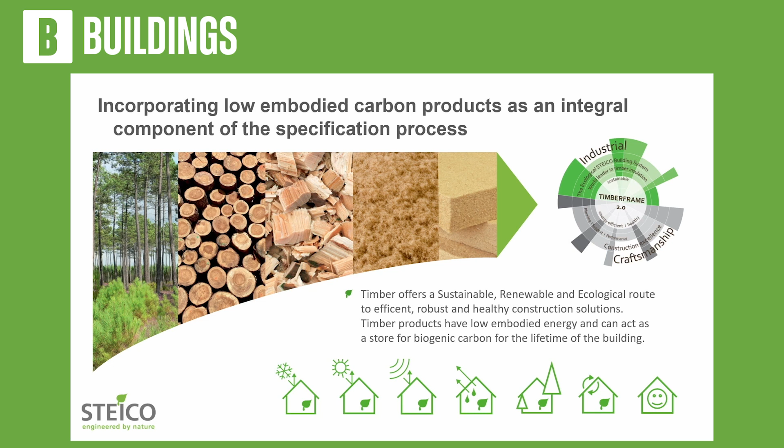All bio-based materials generally have low embodied carbon as a rule and act as a good carbon store. A quick example of this is a project we were involved with at COP26 back in 2021 with Roderick James Architects under the banner of Beyond Zero Homes, which was a combination of like-minded companies that came together to build a low-carbon house. So working together with Circular Ecology, we were able to show that incorporating timber products in walls, roofs, floors helped to reduce the embodied carbon in the building by 22%.

Sorry, should have jumped that one forward.

Which has exceeded even the most stringent targets set out in the RIBA 2030 challenge. What this highlights is that we don't need to wait for things to come along. We're already there. We were able to do it based on bio-based materials back in 2021. So if we built from this base, think of what we could actually achieve by 2030.

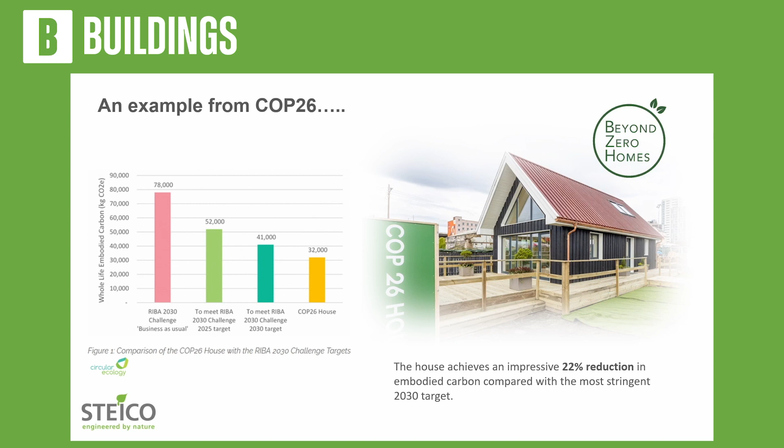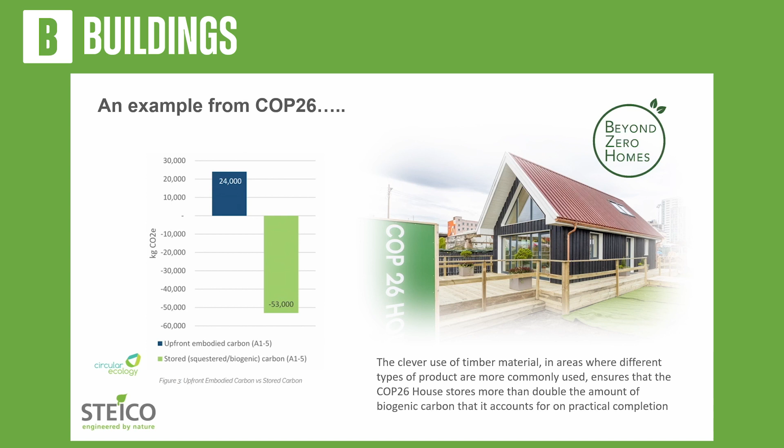So without any further ado, I'd like to introduce Tabitha Binding, who is one of the most knowledgeable wood experts I've ever come across, so it's my pleasure.

Is this working? Yes? Oh, brilliant. Thank you, Craig. It's been such a pleasure to be asked by STEICO to come and speak about specification and low-carbon natural materials. I've worked with STEICO and Craig since the very first TRADA University Challenge, where we were getting interdisciplinary students to work together to understand more about timber and more about natural buildings and materials. So this was put together back in December, but I'm currently on sabbatical.

And I wanted to talk mainly about small projects because Christian will talk about large projects. So is anybody looking at small projects? Like small, so less than 100 square meters. One. Anybody looking at large projects? Oh, there you go, Christian, you got more of them. But STEICO's going to be happy either way.

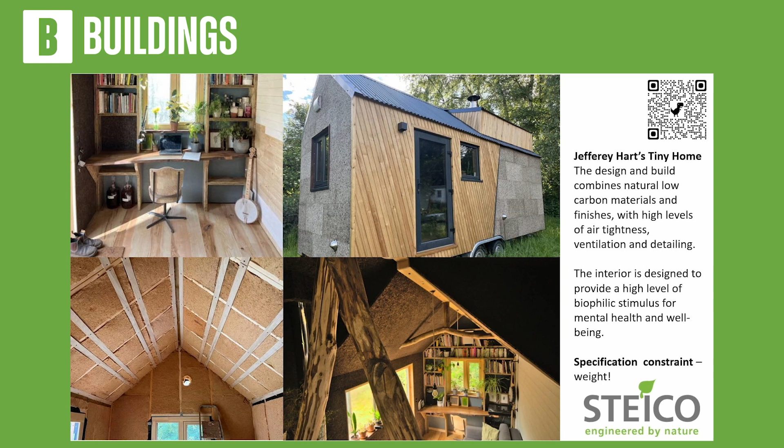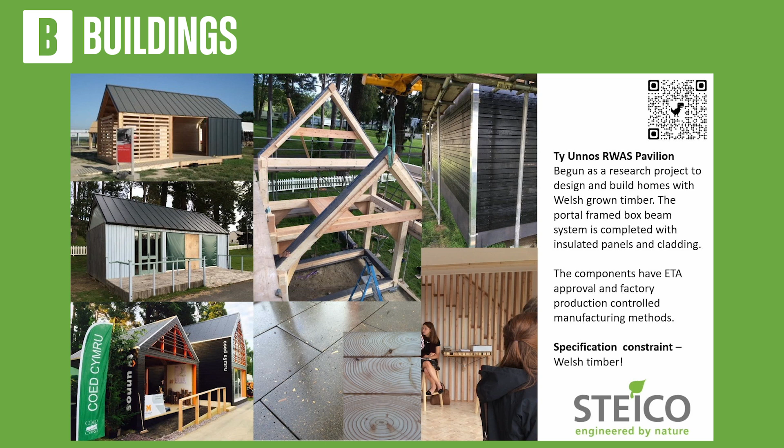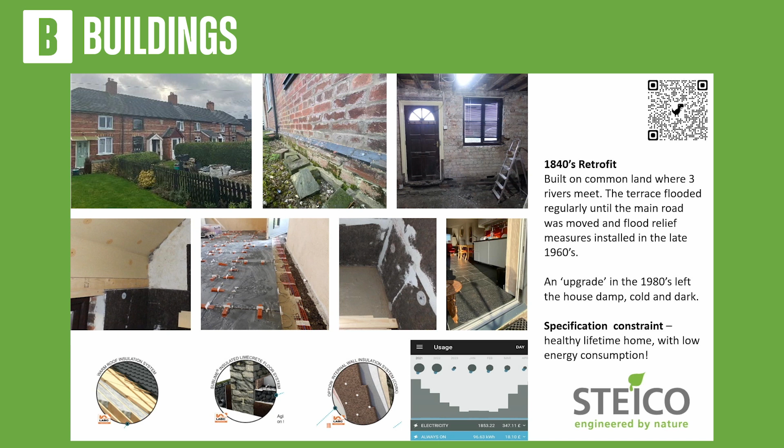That enables me on a 50 square metre home, this is a whole house electric home, to use on average this year 1,850 kilowatts in a year. On average it's about 1,750, so that's 35 to 40 kilowatt hours per metre squared. So we know you can use natural materials, low embodied carbon, and you can get really, really good results. Ask me some questions afterwards, and I'm going to hand over to Christian.

Thank you so much. My name's Christian Dimbleby. I'm from Archetype. As mentioned before, I'm going to be talking about larger non-domestic buildings. I've got 2 slides per page, which means I have to talk twice as quick. So I'm probably not going to cover it in as great detail, but please do feel free to ask me all sorts of questions afterwards.

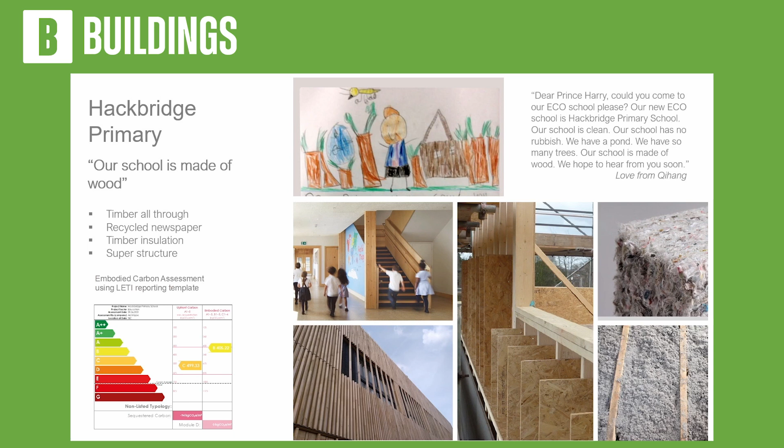So natural materials, when people talk about cost, they may be marginally higher in cost, but actually if you're getting a benefit from speed, that can save you a fortune in your overheads of your building. So you really need to think about the whole holistic system and not just individual price of materials.

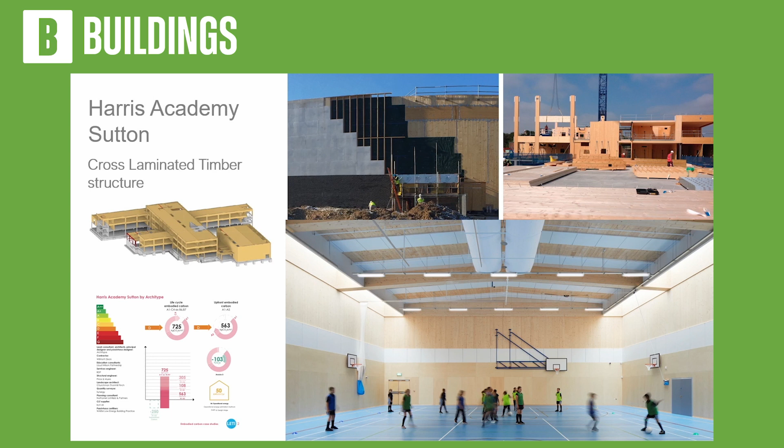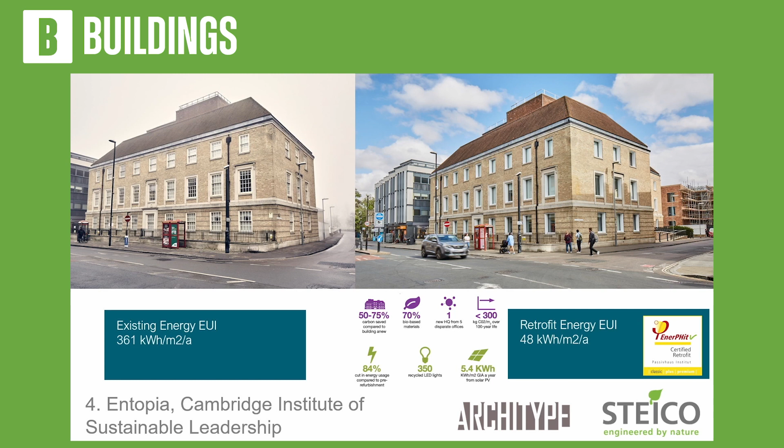The last one is another one also at the UK Green Building Council, the Entopia building. Retrofit is going to be the essential thing going forward. We need to retrofit 80% of our buildings. We need to deep green retrofit them to reduce their energy usage from typical buildings 300 down to about 50. And the only way you can safely do that is with natural materials.

This building did it with Diathonite, cork, lime render, and then wood fibre insulation on the inside. Again, the ceiling was coated with cellulose spray for acoustic performance, and timber cladding. I'm going to hand over so we can have some Q&A questions now. Thank you.

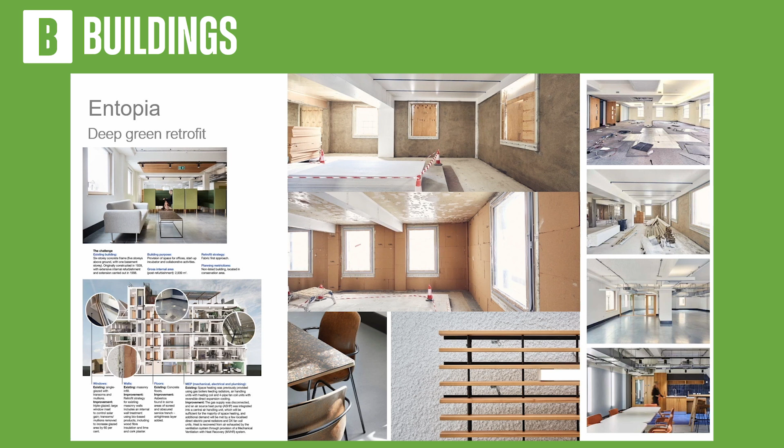So are there any questions from anyone in the audience? Oh, the front.

Hi there. I'm David from Architects Plus. It was really weird. I used to go to Hackbridge Primary School, just down the road from BedZED. I was like, maybe there's another Hackbridge. It didn't look that green when I was there. It's on the site just next to BedZED. So the school you went to is just around the corner. So the two schools work together. A couple of the years operate in this building and a couple of years in the other one. Right. I was looking for the enormous sheds at the back. Yeah. That's great.

We work quite a bit in Sutton and Croydon, that kind of area. And Sutton Council declared a climate emergency a few years ago, upping all the standards, the 35% reduction in CO2. And we're working with other HAs in Sutton Housing Society for some of their quite small infill sites. Have you got any tips that you can share to try and make the small infill sites, that have got to still look like the fairly boring brick houses that we're squeezing them into, more green and sustainable?

I think, for small buildings, it's essential that you choose the right materials, obviously. So brick and block just isn't going to be the way forward. There are lots of buildings around there that have been built out of timber. There's absolutely no reason why you wouldn't use timber-based systems. As Craig was saying earlier, you can hit those really super low carbon targets. You can build in lots of insulation. You can get that energy performance down.